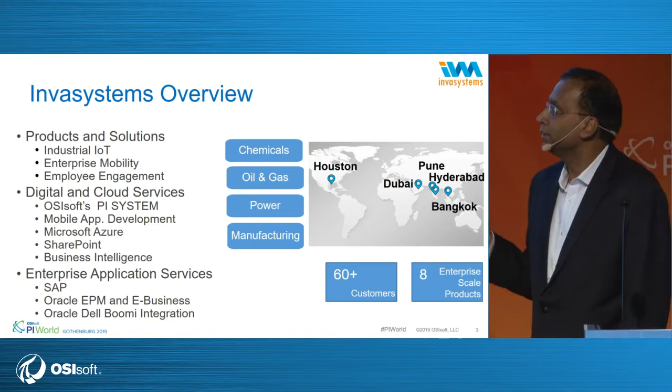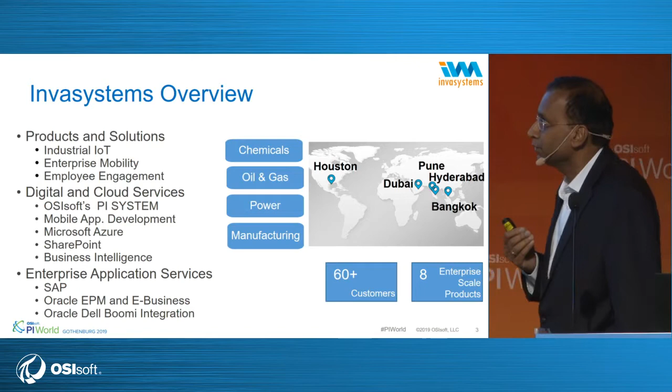The company's focus can be divided into three areas. The first is products and solutions, under which we focus on industrial IoT, enterprise mobility, as well as employee engagement. The second area is digital and cloud services. Along with supporting OSIsoft PI system, we also provide services associated with Microsoft Azure as well as SharePoint. The third area is enterprise applications.

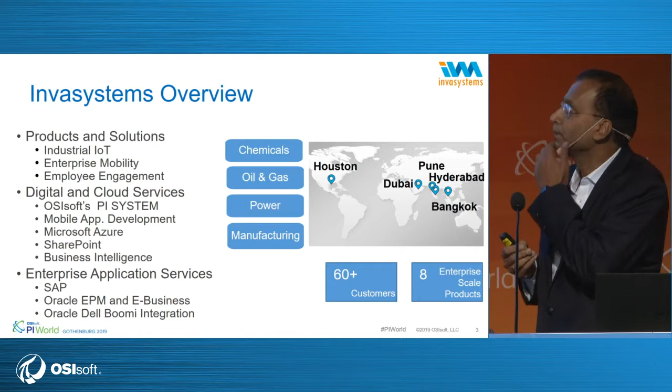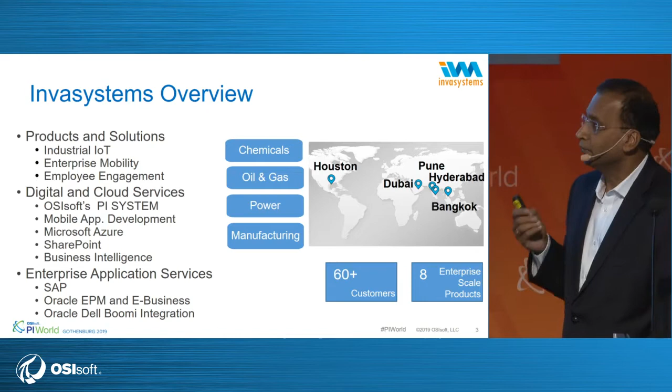One point I would like to stress at this juncture: all the industries mentioned here, chemicals, oil and gas, power, as well as manufacturing, we have subject matter experts in each and every area so that we can have effective communication with our customer, understand the requirements, and provide the right solution.

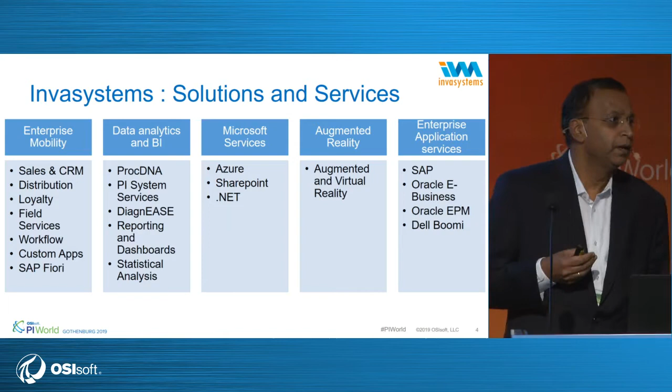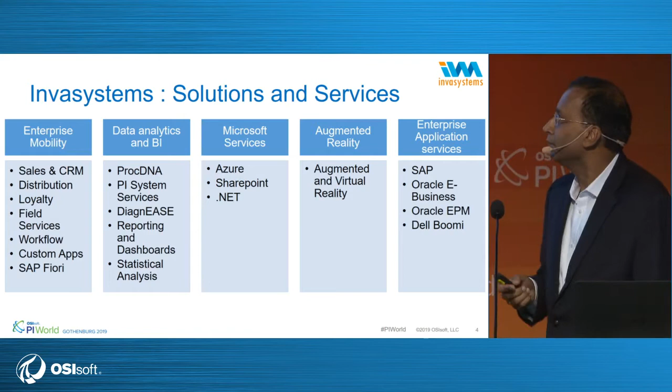Diving into each area in a little more detail, if you look at the second bucket, data analytics and BI, there are two products mentioned. The first is ProcDNA, which we'll talk about more in today's presentation. ProcDNA is our advanced data analytics application, and the second is DiagnEASE, a diagnostic rule engine. When dealing with predictive maintenance, there are many scenarios where you have to set up diagnostic rules. That application goes hand in hand with ProcDNA.

Let me share a couple of points about our partnership with Orion. It started about March of 2018. Initially we started working with the company to provide support for their PI system, including global support for managing their AFs, tags, as well as health checks. Like many other companies, Orion has also put together a variety of applications where they've successfully amalgamated data from different sources, like SAP and proprietary engineering applications. Today we are providing support for such applications as well.

Towards the end of last year, when Orion decided to start their journey on predictive maintenance, we did a presentation on our application ProcDNA, and we were selected for the pilot using that product, and that's what Jens will be presenting today.

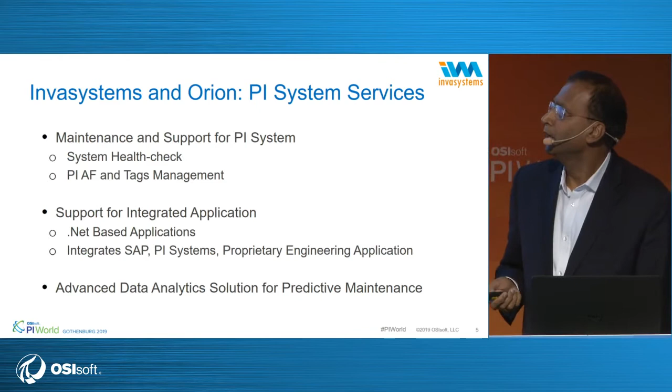A very quick introduction about ProcDNA. It's an advanced data analytics application, and it has a connector to the PI system, meaning you can seamlessly fetch data from the PI system. The application allows you to have two data sets: one for training, that is model building, and the second for validation. How we've been using this application, Jens will cover in great depth in the presentation.

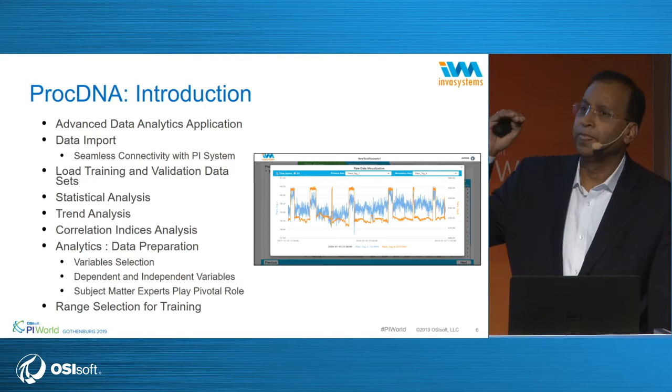Along with statistical information like mean or standard deviation, the application also gives you information about the correlation index. Why do you need that? Our advanced data analytics is based on neural network, meaning there's a concept of dependent variable and independent variable. This correlation index guides you in selecting the right variables. Nonetheless, the biggest role the subject matter expert plays in our application is the selection of those variables.

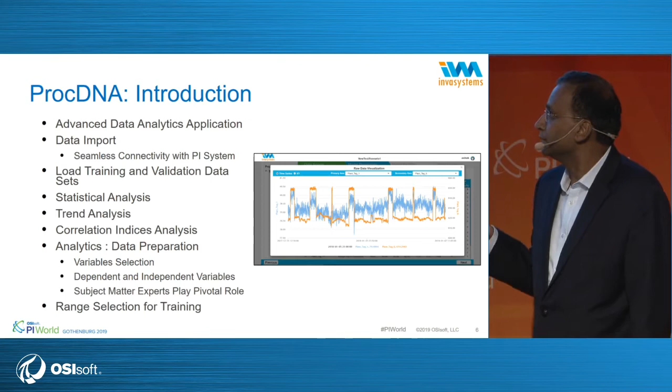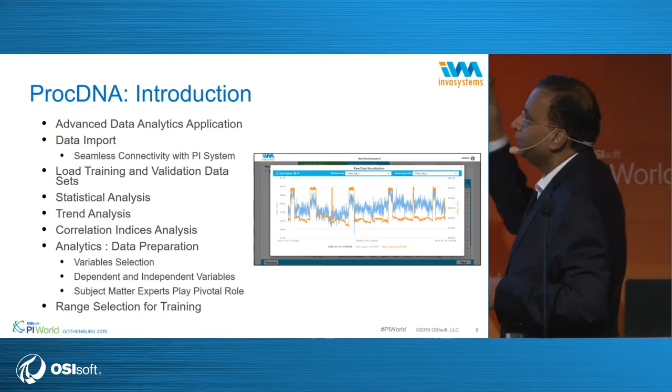Last but not least, when you get data from the PI system, you don't want your analytics to learn everything you're getting. The application allows you to select a specific range and then build your model. Here are a couple of screen captures from the application for model training as well as model validation. This is how the application was used for predictive maintenance at Orion.

I would like to hand over the microphone to Jens now. He's going to present one case study today, and he's also going to present tomorrow at the panel session a second case study. Jens.

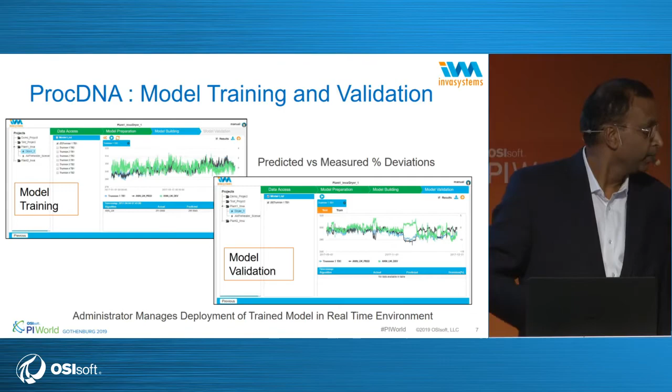Thank you, and good afternoon, everybody. My name is Jens Smits. I'm working for Orion Engineered Carbons, which is one of the world's leading companies producing carbon black. I'm working as a reliability director for Orion.

You may ask yourself, what the heck is carbon black and what is it used for? That's one of the products currently used everywhere, but nobody knows about it. So if you look around in this room, everything that's black is colored because of carbon black. It includes, for example, cases for laptops, plastics, tires, ceilings, any products made of plastic, also including toners and printing inks, coatings, and all black products.

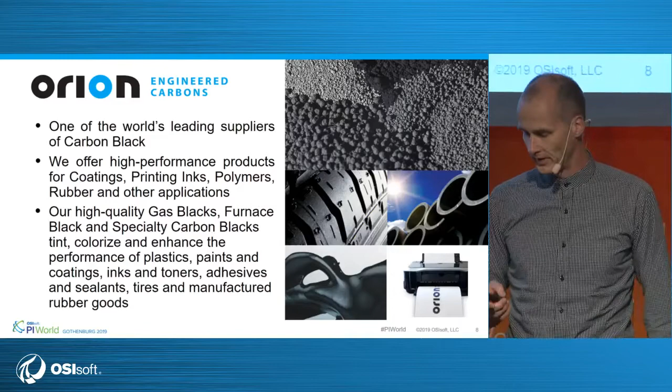We are running our business with more than 1,400 employees in 14 plants worldwide.

Getting back to OSI PI, we've been using OSI PI for just one year. We're running OSI PI with 45,000 tags, with a central asset framework server for all of our plants globally. This is a globally standardized system for us, which includes process data, quality data, and also ERP data, such as SAP, for example.

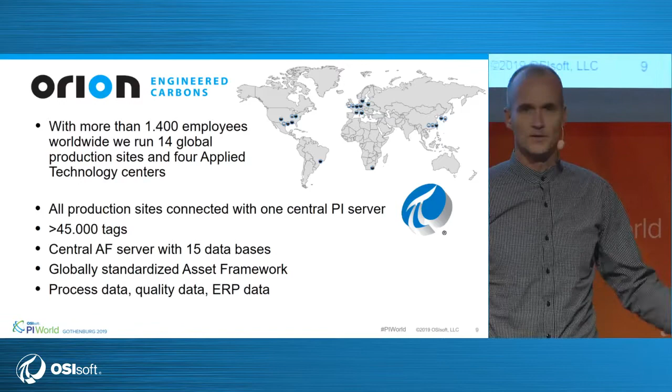The partnering with Invasystems regarding predictive maintenance started for us with a reliability initiative Orion started last year, mainly to reduce downtimes on our production units, focusing on better planning to have more reliability and pre-planning for our maintenance. This initiative included two parts: condition monitoring and predictive maintenance.

In condition monitoring, we are trying to implement more sensors which are relevant for maintenance, as well as getting status information about the condition of our equipment, which we would like to see in easy accessible dashboards.

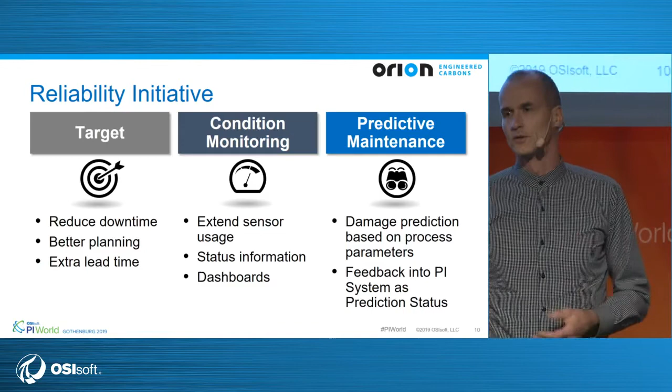The predictive maintenance part of this initiative was mainly based on the effort to predict damages based on the reliability sensors we install, but also relying on the process sensors we already have in our plant for production purposes. One of the main approaches was also to include all that into OSI Pi.

For implementing this initiative, we started a reliability pilot project in one of our biggest plants, located in Germany. We improved the OSI Pi dashboards we already had and implemented more detailed equipment dashboards to see more details, for example on vibration analysis of running equipment. But all of our displays prepared in that pilot plant are always based on a global asset framework standard for all of our plants globally.

The predictive maintenance pilot with Invasystems started in December last year, and we focused on prediction models for our large-scale heat exchangers, which we run in all of our plants globally, as well as rotary dryers, which are also part of our standard process globally.

The part with Invasystems included workshops on getting more insight about our process, for better understanding of these processes, as well as preparing the first models, which have been rolled out in May this year.

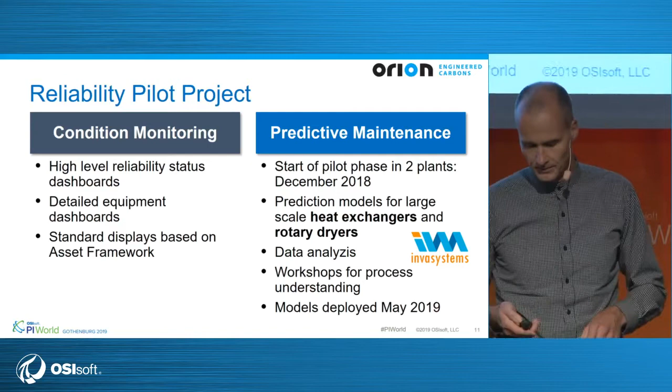I would like to go deeply into one of these models we created. One of the examples is the modeling for a large-scale heat exchanger.

These heat exchangers are 2.5 meters in diameter and between 13 and 20 meters high, running at a maximum temperature of 900 degrees centigrade. These heat exchangers are a very important part of our process equipment. I would like to explain a little bit more how carbon black is produced, so you get an understanding of what we are doing and why we are trying to predict a certain process parameter.

Imagine at home you have a candle, it's burning, and usually it's just a flame. There should be no carbon black produced. But if you take a cold spoon and hold that into the flame, you would get something black on that spoon, and that's carbon black. It's pure carbon. This is all about producing carbon black.

So it's rather easy, but we do that in a large-scale reactor. It's a tube about 2 meters in diameter and up to 50 meters long. That's the reactor. We have a small candle burning in here, provided by oil and natural gas. The natural gas is the candle, and the oil gets sprayed into that burning flame. So we have a temperature of about 1,200 degrees centigrade in that reactor.

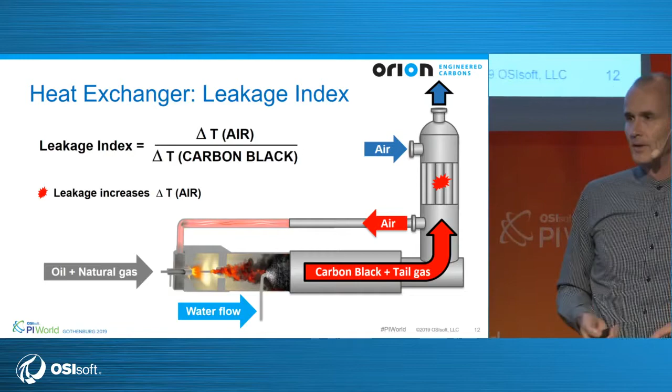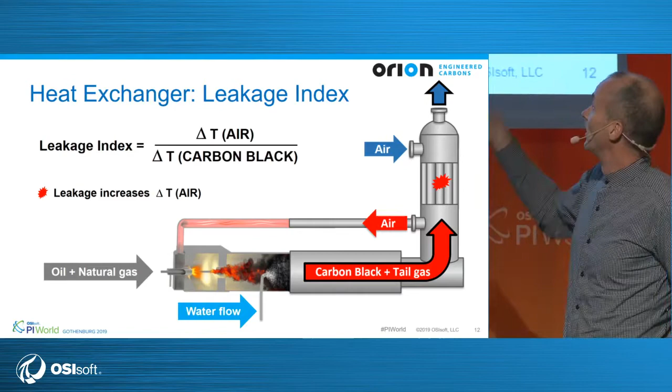To determine this leakage, we are using a KPI which we call the leakage index. The leakage index is just the ratio between the temperature differences between the airflow and the hot tail gas flow here. So that's for us a major indicator about the condition of this heat exchanger.

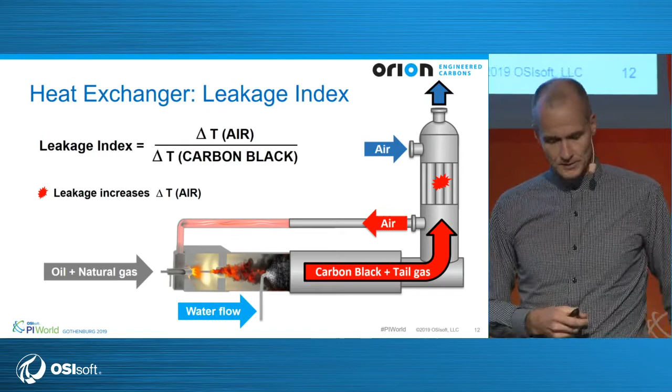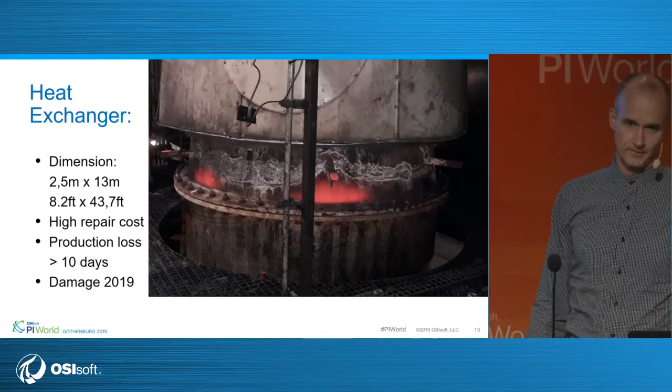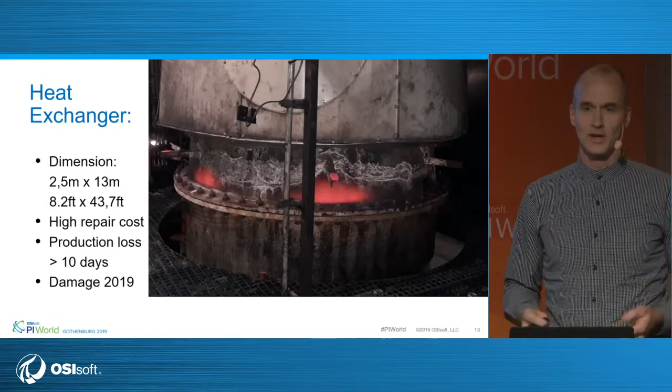This is how a heat exchanger looks like when the tubes are leaking. You see the red glowing part of that heat exchanger. If you see something like that, it's nearly too late. We want to see that in advance.

So our leakage index gets calculated in OSIsoft PI. We can see that, we have all the temperatures, there are sensors in that, and we are calculating the leakage index.

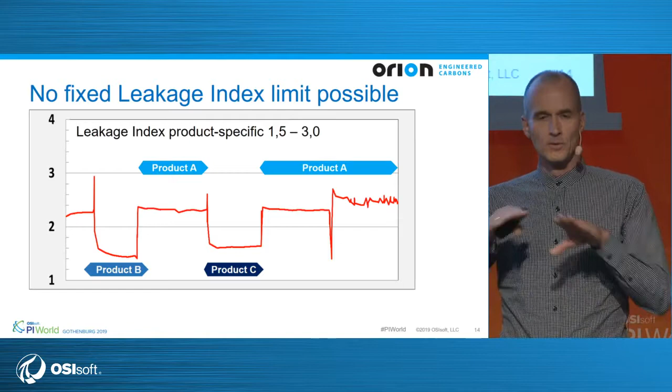But because the leakage index differs between different products we run on our reactors, we are frequently changing the products on these reactor lines. Different products may have different leakage indexes because of different temperature conditions in the heat exchanger. We can't just set a fixed alarm limit which would indicate a leakage at the heat exchanger. So this was one reason to see if we could use advanced analytics with ProcDNA from Invasystems to determine which level of leakage index would indicate that a leakage is occurring.

If you think back to what Ashok explained about independent and dependent parameters used for the advanced analytic software, what we did for the model is take our leakage index, which is calculated by the temperatures, and several parameters which influence the temperature level at the heat exchanger.

This is the oil flow, the flow of oil which we put into the reactor - the more oil we put in, in general the higher the heat is in the heat exchanger. We have the natural gas flow, which also affects temperatures, as well as the airflow rate going into the reactor for combustion, the air pressure, the tail gas pressure which leaves the heat exchanger, and the water flow, which cools down the reaction.

So these are our independent parameters, all influencing the dependent parameter, which is the leakage index. Based on the historical data, ProcDNA will learn the dependencies between dependent and independent parameters.

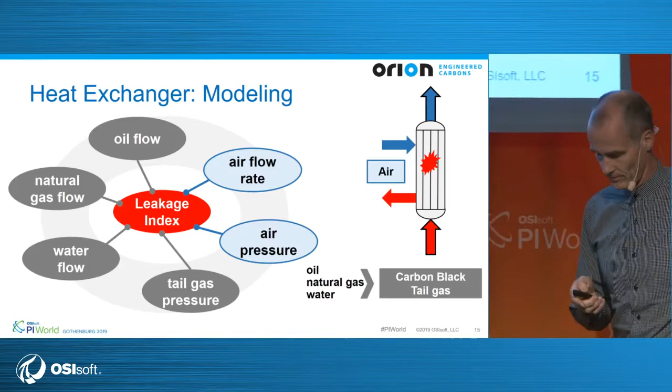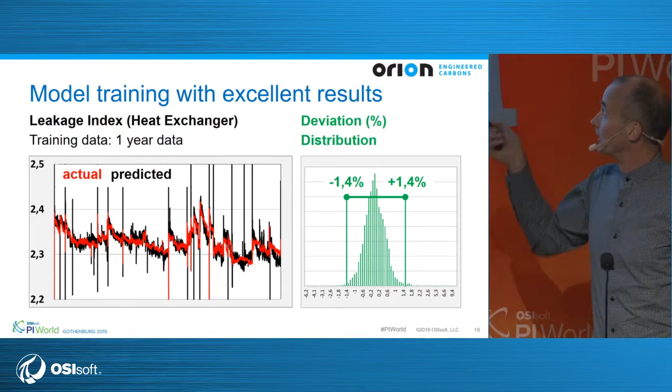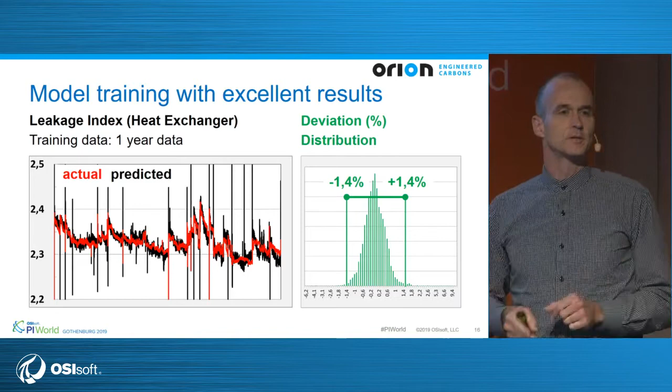We see that on the right side, which is the deviation between actual and predicted leakage index. The maximum deviation here is around plus minus 1.4%, so that's a rather small deviation. When you look at the form of that deviation, it's quite narrow, meaning the quality of prediction is rather good - the more narrow this distribution is, the better the prediction. If we found a very broad distribution, we would see that the independent parameters are not okay. So you need to play around with that a bit to find the right independent parameters.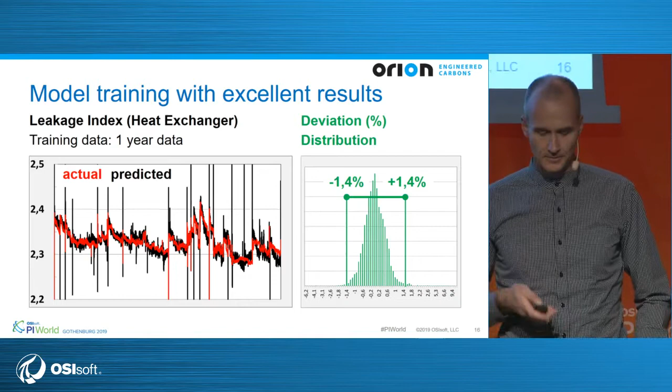Unfortunately, we were a bit too late with our prediction models, with rolling them out, because before we were able to roll this out, we had a damage on one of our heat exchangers - that was the picture I showed you before.

And that's the point in time where we shut down this line, because we noticed there's a leakage and damage to this heat exchanger.

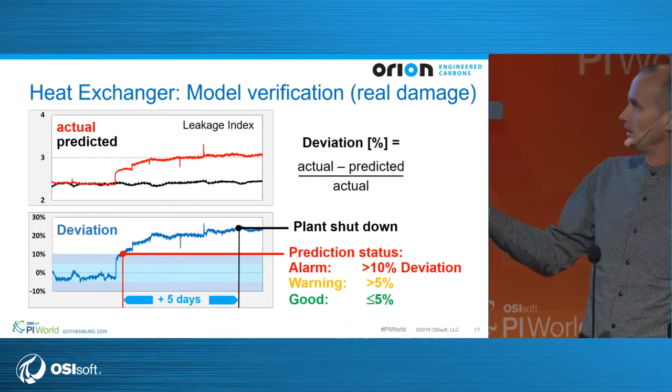So this would have given us an additional 5 days of lead time. 5 days might sound short, but the problem is also that 5 days before the damage, the heat exchanger damage would not have been as extensive as it had been.

To further monitor these leakage indexes, we are calculating the predicted leakage index with ProcDNA. Also, ProcDNA calculates the deviation, and both of these values are delivered back into OSIPI. So we have all the data available, so ProcDNA learns, creates that model, calculates the predicted leakage index, and the values get back into OSIPI.

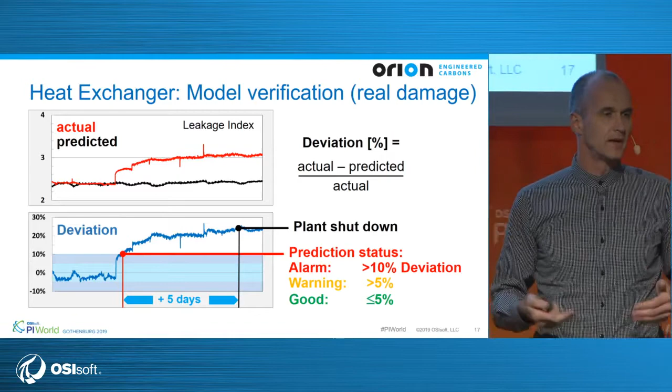Where we can use them to calculate and determine what I call a prediction status. So the prediction status is rather simple. It says if the deviation between both is more than 10%, we have an alarm level. If it's less, then we have a warning, and if it's within a certain bandwidth, it's good. This is also calculated in OSIPI, and that means we have a tag, prediction status, which says good, warning, and alarm level.

So these calculations go back into OSIPI. We visualize them in PI Vision. We have an equipment dashboard here for the air preheaters, for the heat exchanger, which shows the major temperature and pressure values which we need to evaluate our heat exchanger leakage index.

It shows the leakage index itself. It shows the leakage index compared to the predicted leakage index. It shows the deviation, and it shows also the status here, including the prediction status. You see that over here.

I just included in the asset framework the prediction status, as I said, alarm, warning, and good level, which is here displayed in green, yellow, and red. And we have the current utilization of that displayed in gray.

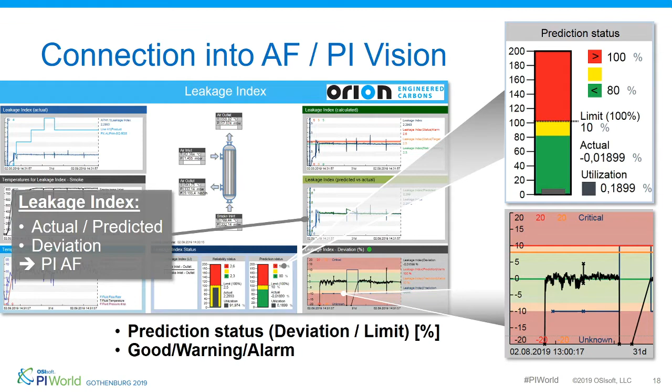That means our overall limit is 10%, beginning with 10% deviation. We would like to get an alarm here, and this utilization is just calculated as 100% we are taking the 10%, and currently we have an actual value of 0.01% deviation. That means we have a utilization of this complete warning level of about 0.18%.

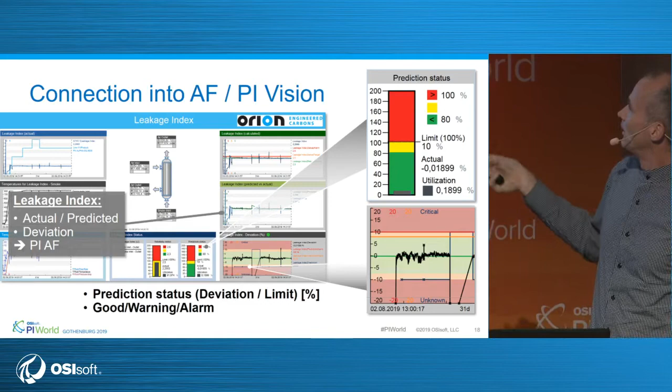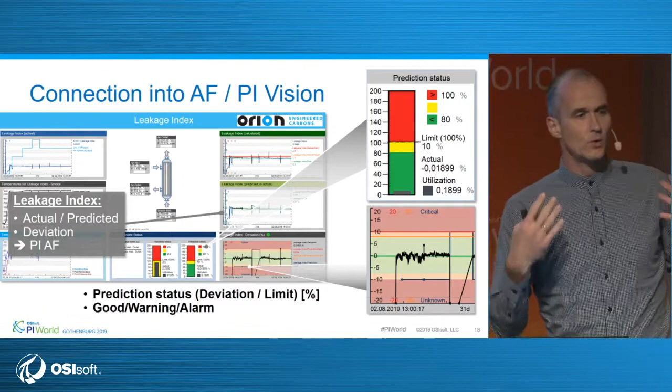So that's indicated above. Down here we have the same, just displayed as a time range for the whole prediction. So that would allow us to have equipment dashboards which are accessible for the guys from production to immediately look at that and see what happens in regard to the leakage index on their air preheaters on the different lines.

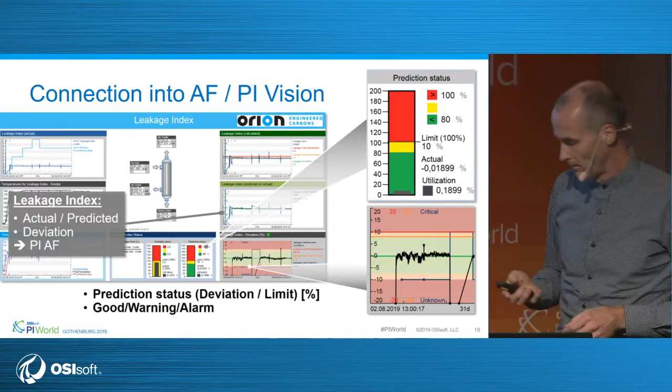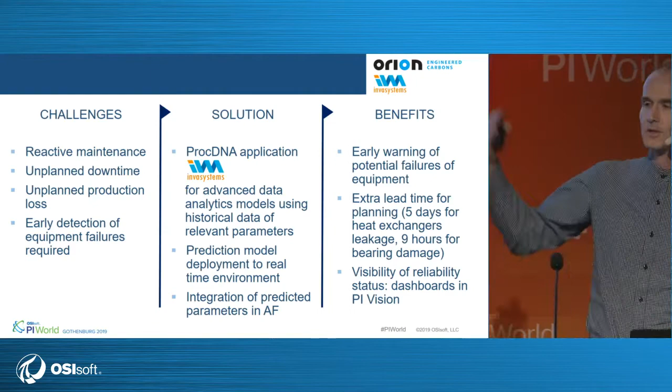The way we did that together with Invasystems is of course a bit more than what I just explained. So what's required for preparing these prediction models is, first you need to have the data. If you have OSIPI, you hopefully have all this data available. You need to have this data available also in a time range of at least half a year, maybe more, to get enough historical data to train your system as well as to test the data.

You need to cleanse that data because you should not include any failure data, because you don't want to train your model with data which already indicates a failure. That would mislead the model.

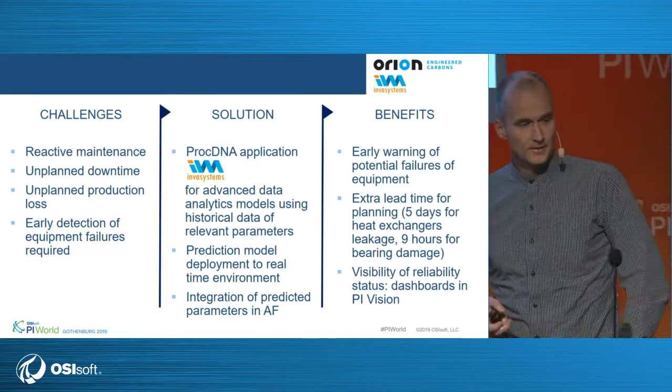So we implemented the ProcDNA application together with Invasystems. We deployed prediction models for heat exchangers as well as for our rotary dryers. We will speak about that tomorrow during the panel session. For the rotary dryers, we are predicting the bearing temperatures of the rollers where the rotary dryer sits on.

So that's a completely different application, but which proves the practicability of Invasystems ProcDNA, because in my eyes, the main opportunity we have and the main advantage is that we don't need a physical model for the prediction. So for ProcDNA, it doesn't matter if you are including the moon phases or whatever, as long as it has influence on your parameter which you want to control.

So we deployed all these models. They are linked into OSIPI. They bring the data, the results into OSIPI, and they provide us some extra lead time to be prepared about the damages. So it doesn't help, of course, to prevent these damages, because especially leakage index will indicate the leakage once it happens. So it doesn't stop the heat exchanger from leaking, but for us the main important part is that we get some more time to be prepared, and that's our main outcome of this project.

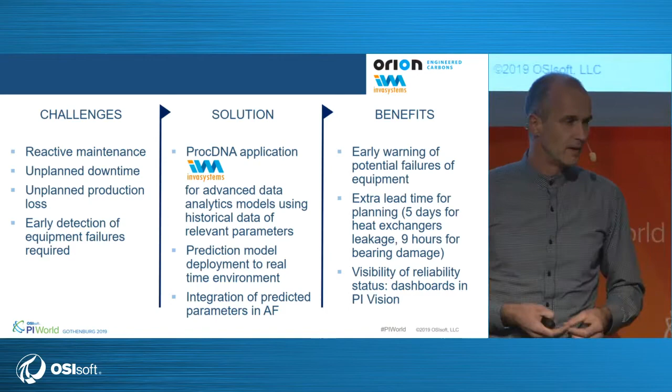And as well, the main focus for us was also to bring all that into OSIPI, to have one system to look at and to provide to our shift personnel to look at the air preheaters to be prepared for what happens here. So this is for us a major improvement, and we are continuing working with Invasystems also with other equipment types.